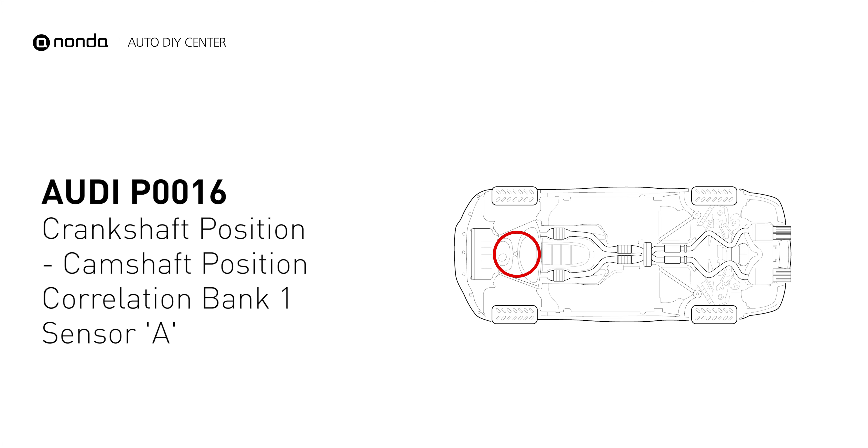It indicates that the camshaft position sensor A for bank 1 does not correlate to the signal from the crankshaft position sensor. Here are 4 of the most practical solutions to fix Audi's P0016 error code. Method A. Oil change.

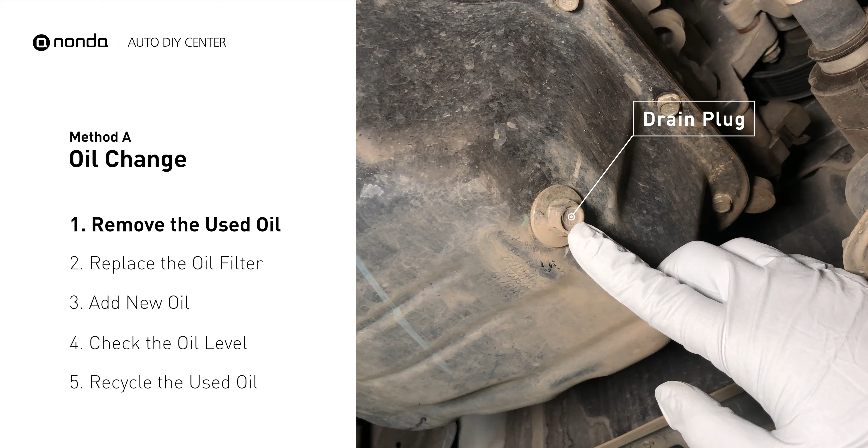Locate the oil drain plug on your vehicle and place an oil collection pan underneath it. Use a socket ratchet to remove the plug from the oil pan on your vehicle. Once the plug is removed, the oil should start flowing out into your collection pan. Once all the oil is drained, replace the drain plug and tighten it back on.

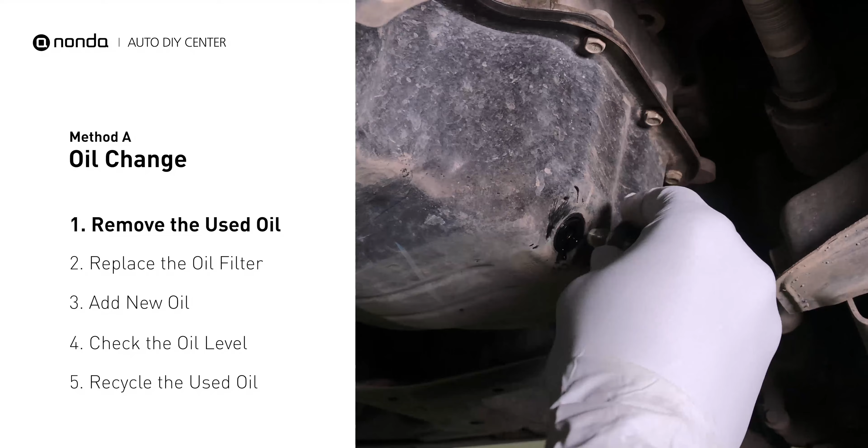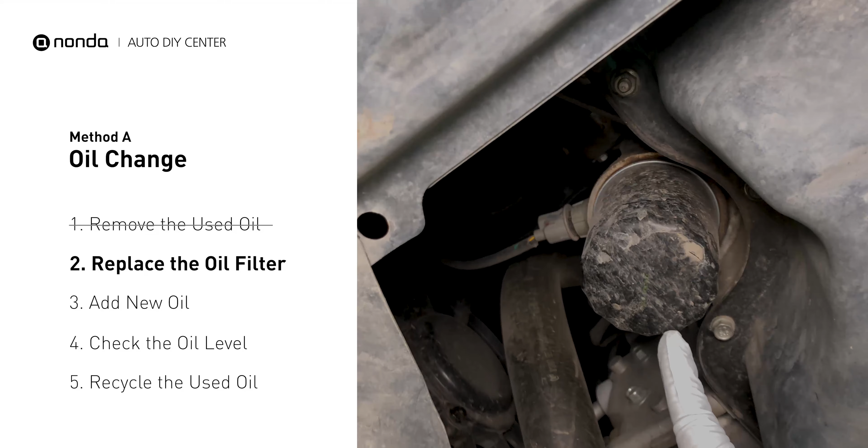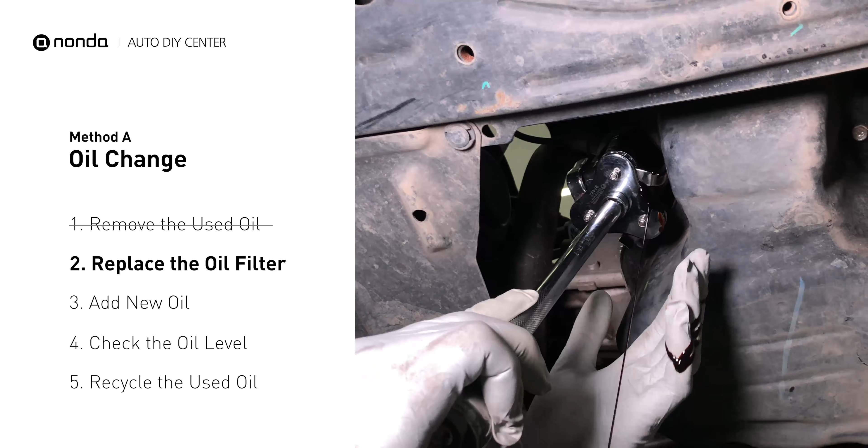The oil filter is usually located beside the oil pan or under the hood of your vehicle near the engine. Place the collection pan under the filter. There would be oil in the filter itself that could be hot, so it is important that the oil goes into the collection pan. Spread a bit of fresh oil evenly on the new filter's gasket. Then install the new oil filter. Tighten the filter an additional 3/4 of a turn. Be sure not to over-tighten.

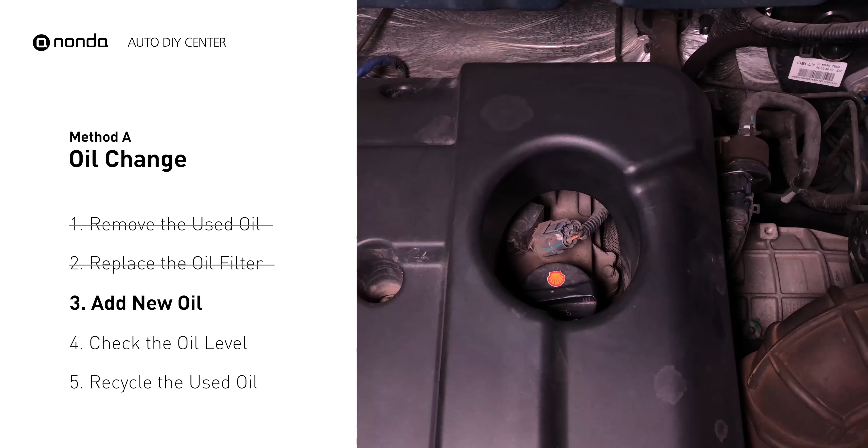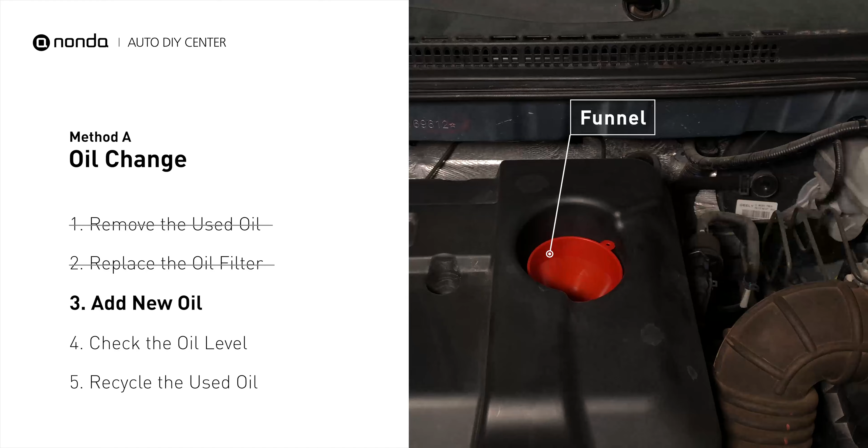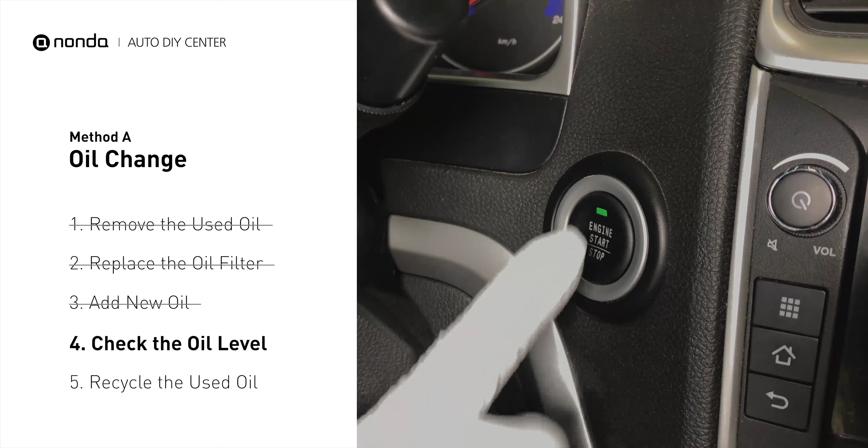To fill the vehicle with fresh oil, you should first locate your oil fill cap at the top of the engine. Clean the cap before removing it. Take the cap off and place the funnel into the opening. Add the amount of oil specified in your owner's manual, and then replace the cap. After the oil change, start the engine and let it run for a minute to bring your oil pressure up and recheck your oil level.

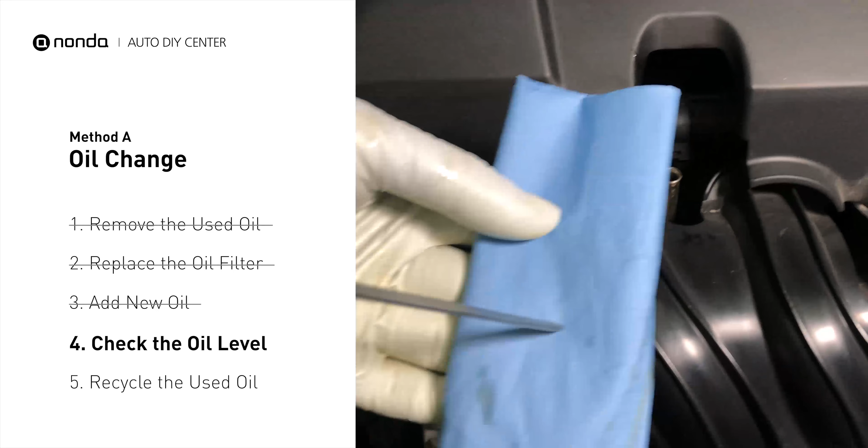To check oil levels, pull the dipstick out and clean it off. Replace the dipstick and pull it out again. The oil should be near the top dot or fill line. If it is close to the lower dot, you'll need to add more oil. If your oil levels are good, replace the dipstick and shut the hood.

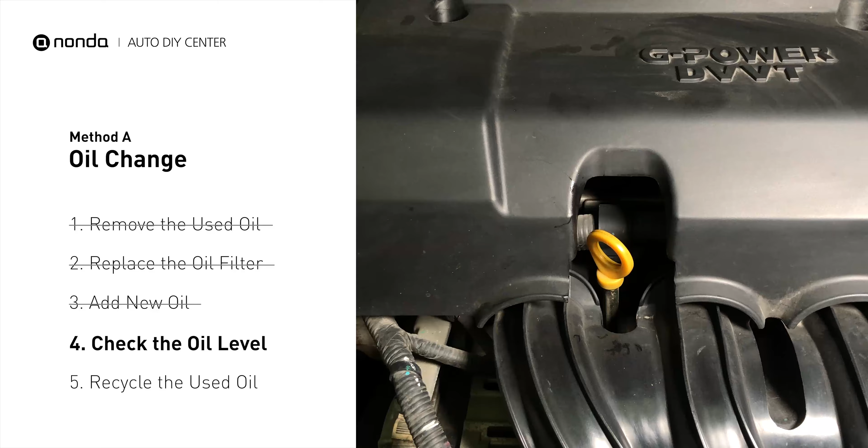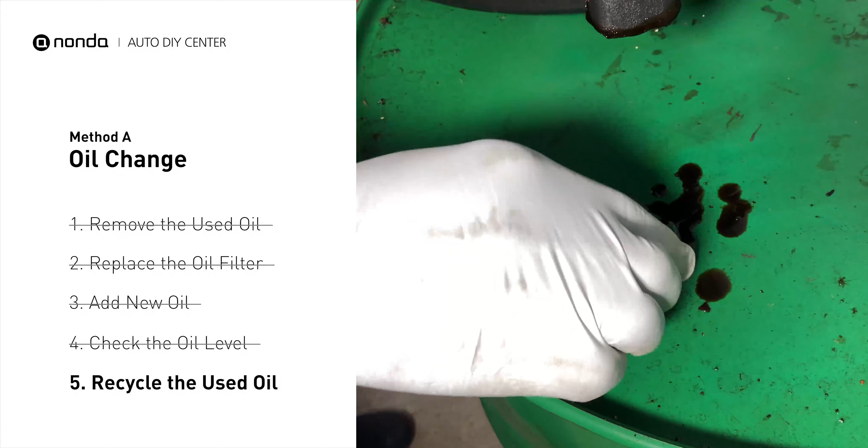Place the used oil from your collection pan into an airtight container with a screw-on cap. Make sure the oil is cooled before transferring to the container. Used motor oil can be recycled at most auto stores or at recycling centers. Method B. The Camshaft Oil Control Valve.

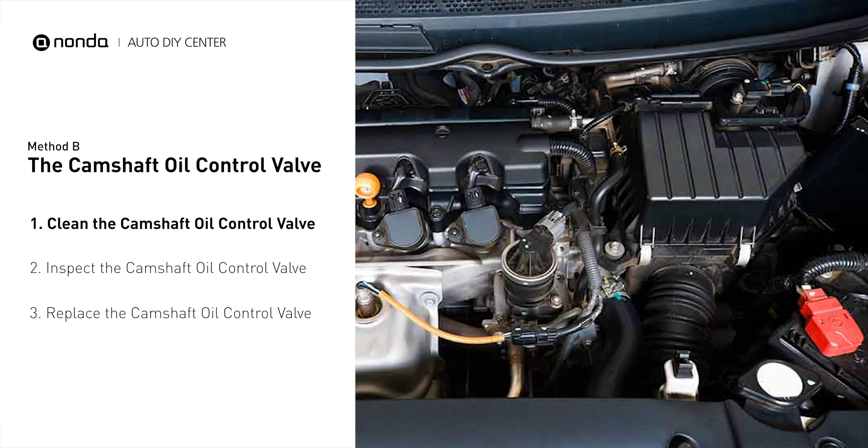The camshaft oil control valves are usually located in cars that have engines with variable valve timing systems in them. First, carefully remove the camshaft oil control valve from the engine. Use a valve cleaner to clean the camshaft oil control valve.

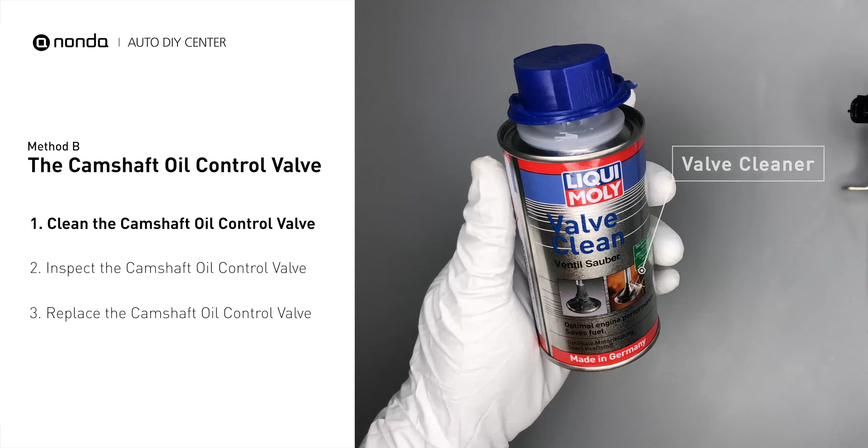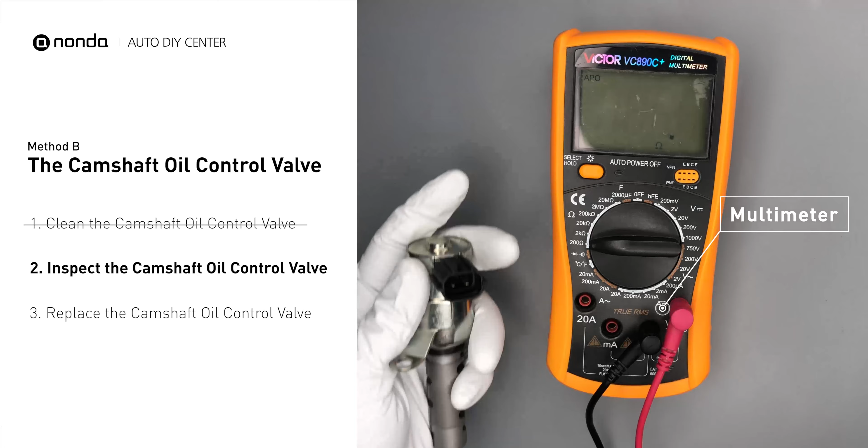Then use a multimeter to proceed with a test on the camshaft oil control valve. At an ambient temperature of 68 degrees Fahrenheit, the valve resistance is between 6.9 ohms to 7.9 ohms. If you do not get a reading, this indicates that the camshaft oil control valve is faulty and needs to be replaced.

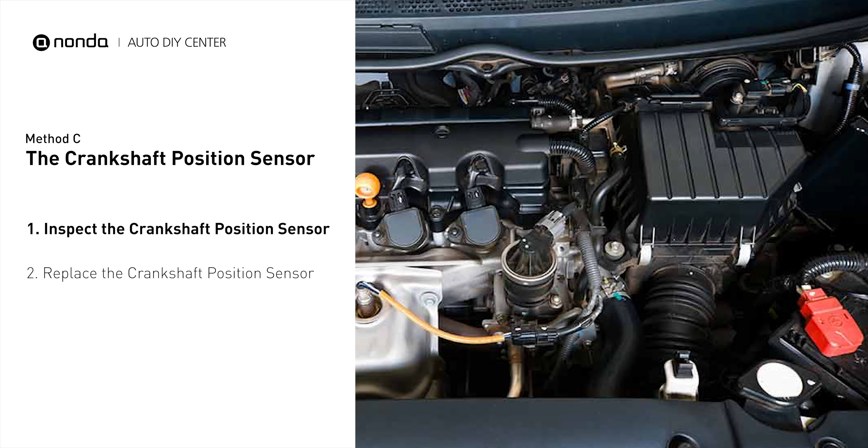Method C. The Crankshaft Position Sensor. The camshaft position sensor is located in the valve cover near the top of the engine, or it can be located at the front or rear of the cylinder head. First, carefully remove the camshaft position sensor from the vehicle. Visually inspect the sensor to make sure it hasn't been contaminated by a leak from another engine component.

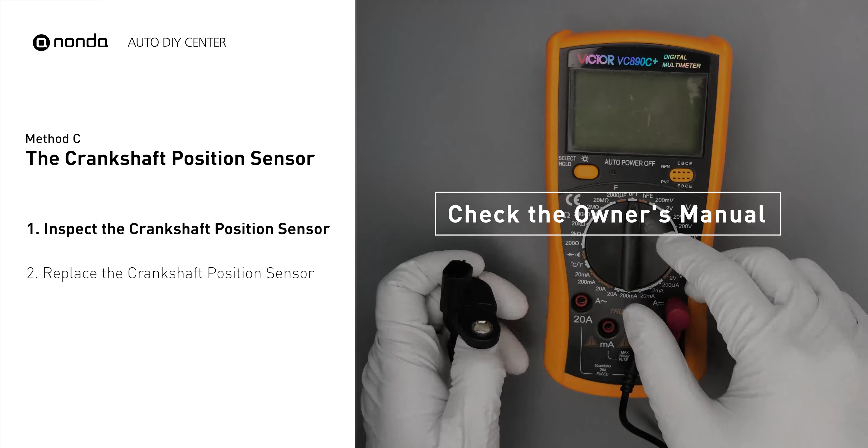Use a multimeter to proceed with a test on the crankshaft position sensor. In order to get a correct reading, check your owner's manual to see the specific camshaft position sensor resistance range for your vehicle. If you do not get a reading, this indicates that the camshaft position sensor is faulty and needs to be replaced. Check to make sure the O-ring from the sensor hasn't fallen into its hole. Then replace it with a new camshaft position sensor.

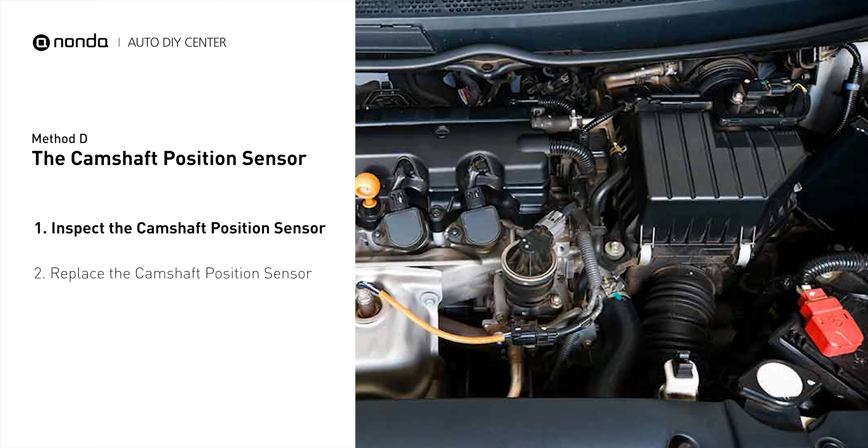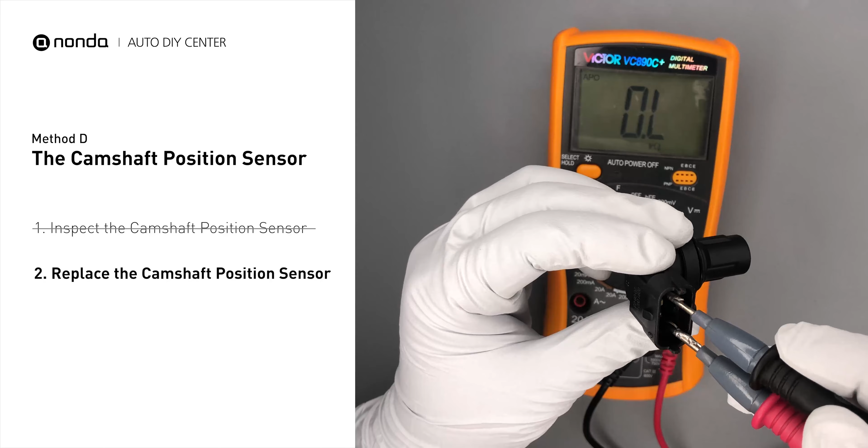Use a multimeter to proceed with a resistance test on the camshaft position sensor. In order to get a correct reading, check your owner's manual to see the specific camshaft position sensor resistance range for your vehicle. If you don't get a reading, this indicates that the camshaft position sensor is faulty and needs to be replaced. Check to make sure the O-ring from the sensor hasn't fallen into its hole. Then replace it with a new camshaft position sensor.

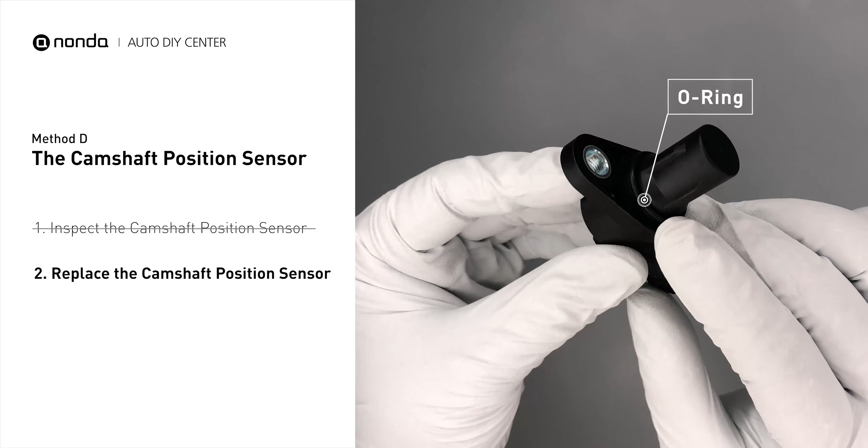So here are 4 of the most practical solutions to fix Audi's P0016 error code. And tap the rescan button one more time to make sure everything is fine with your vehicle.